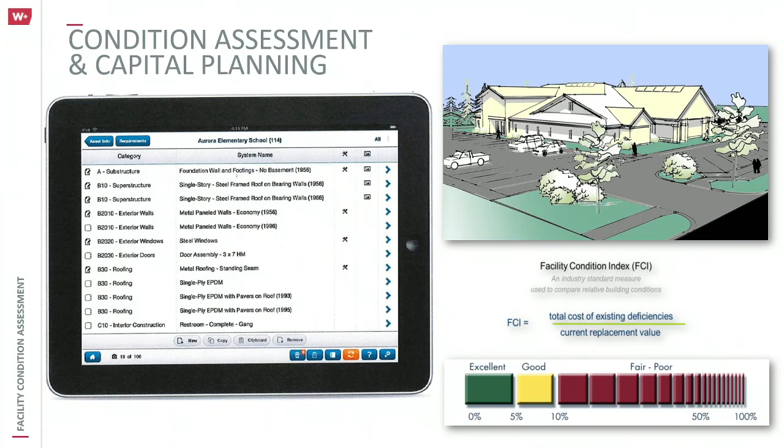We use a program called VFA, which has two phases. One is the field collection of information, and the other is analyzing it. It's all done on a tablet, and the assessors, the architects and engineers go out and look at all the systems, the site, and all of the components.

Everything is tied to two industry standards: BOMA, the Building Owners and Managers Association, which has established life cycles for all building and site components, and RS Means, which is an industry standard construction estimating database.

The auditors receive their assignments on the mobile device. If we were assessing a room, for instance, we would look at the acoustic tile ceiling and say, generally not in bad shape, a few things need to be replaced. You'd key that in, and it would automatically generate a cost for doing that, as well as when it's estimated it needs to be replaced. So you have that for each building and site component.

The information is objective, it's transparent, and it's defensible because it's tied to industry standard databases. It's not our guess as to what it would cost.

From that, you get a listing for each building of what is required by year, so that the city, the city manager, and facility people can look at that as you're doing your budgeting for each year. You can say, okay, we have to be prepared in 5 years to replace the roof, we need to be prepared to replace the heating system in 8 years. Will it fail then? It's not guaranteed, but at least you have a benchmark to plan going forward.

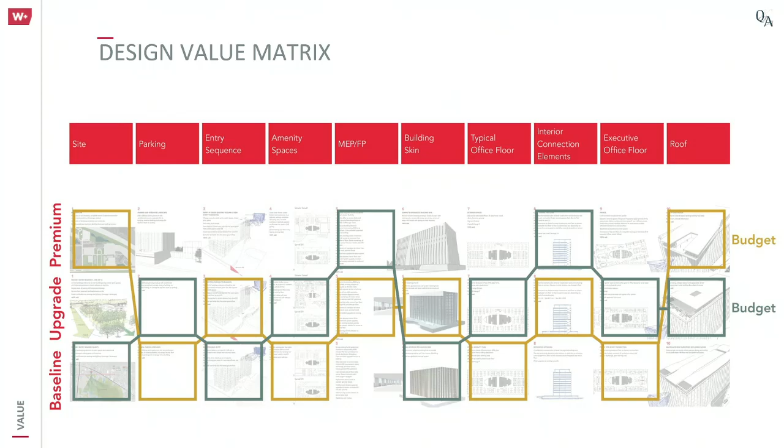Our goal is to identify options. I know this is impossible to read, so just look at the colors and the boxes. By providing options for you and dialogue with you—you might have heard us use the term listen, we don't do this in a vacuum—we're very much a collaborative process. Working together, identifying through a design value matrix what are the best options to pick, so that we identify any changes needed early on in the process, when it's easier and much less costly to change. That's something we're proud of at Wightman and that we've used for years with our clients on architectural projects.

So it's really important that we identify those factors that are going to affect maintenance and control them early on through the selection of materials and processes as we design the building.

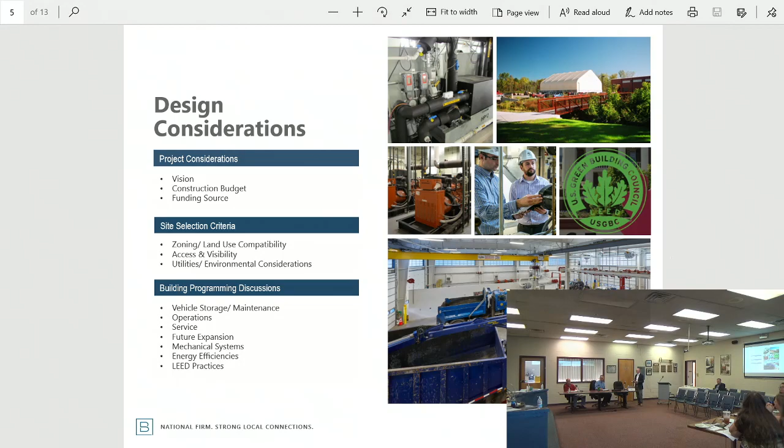What I'd like to do is turn it over to Brian a bit on the design side, to give you a sense of what we look at when we look at building design, site selection, and system design. We'll give a little excerpt on that, and then flow into some of the programming pieces.

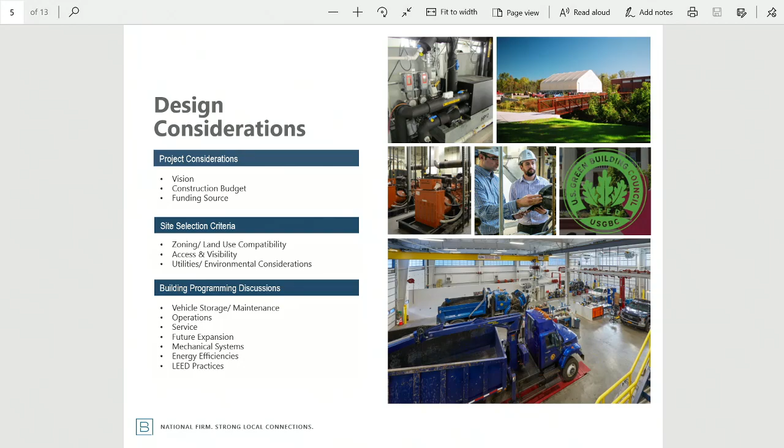So the first item on the list is visioning. That's specific to what you've heard of as visioning sessions—just to see what you have in mind for the facility. Not only what you have in mind, but what the uses are going to be, what the needs of that facility are. From that, you look at certain processes—all high level, looking at vision, construction budget, and funding source, focused on the main purpose of the facility. We're also looking at the physical attributes when it comes to that visioning, and those attributes could be anything from the longevity to the maintenance of the facility.

We're also looking at whether you want that facility to be green, LEED, even net zero for that matter. Those are very specific, those are very important items to know up front. They'll affect the decisions as they go through that whole process.

And then last but not least is really the appearance. It's obviously something that you want people to know that where their funding went, it was worth it, something that will hold up, something that, depending on the location of that facility, is really an important factor to how that building is perceived from that curb appeal standpoint or appearance.

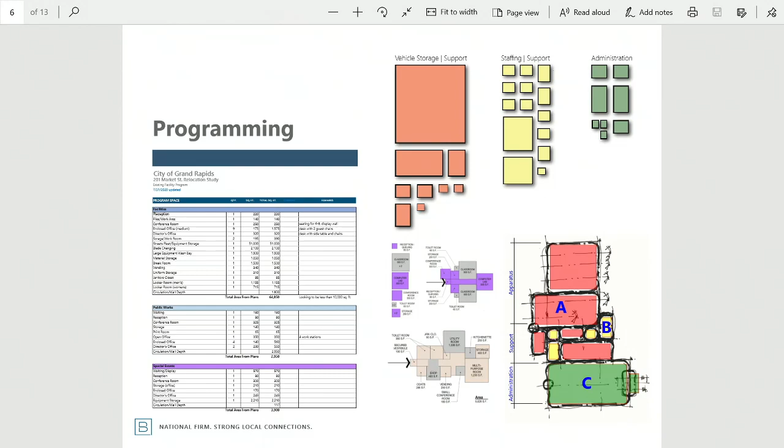If it was a little larger, you could see that this first column here is actually the spaces, those needs, those uses. Those are assigned a quantity, meaning if there's so many restrooms, toilet rooms, showers, or what have you, those get assigned a quantity as well as a square footage. And then there's remarks if there's some specifics that are defined. So this really gives just an outline, a real program outline.

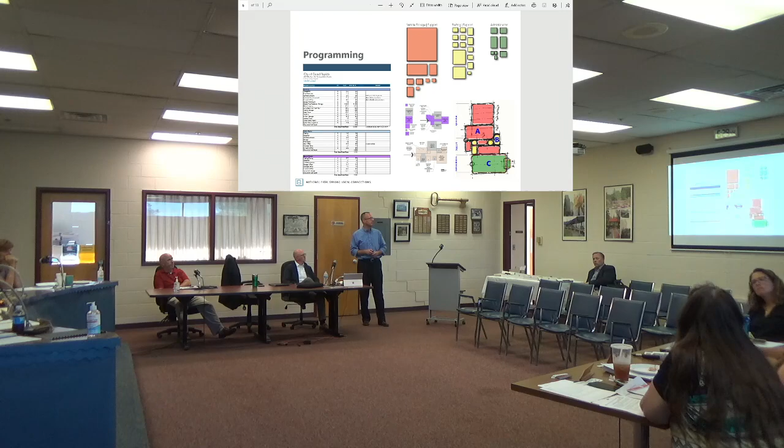And so from that stage, looking at space relationships, it's easiest to take those square footages that you see within these columns and give a graphical representation. Here we'll see some larger spaces, whether that's a large apparatus bay or garage of sorts, and maybe there's a certain shop size that you can see. But what that does is it gives you an idea as far as relationships for how those spaces are to be developed or can interconnect or link.

And so here we see different color coding, which defines the different types of spaces, whether it's more for administration or more for maintenance. And then from that stage, it's the idea that we take it and start reorganizing those spaces so that there's a flow that goes through, from maybe there's a certain procession or entryway, what has to be adjacent to that from a public standpoint, is there a certain definitive line between more of a public and private standpoint, and will there be any point of those two interacting?

So that really becomes a block diagram, what we consider, and then this is more of a sketch to start seeing how all these different relationships can be assembled in one large mass, or one large footprint. And here we can start seeing nodes that start defining entryway, and then we start seeing some idea of access as well as different types of uses, how those can be intermingled in that space.

So that's really, like I said, this is just one tool, one way of taking the information and starting to develop, which you can see through that outline here, you can start seeing a building or a form develop from that.

With that, when we do look at a site, there are some components, and I'm going to have Brian walk through these, but these are major factors when we look at the building. Obviously we want to put a building on the site, but there's sometimes a cost, there's some restrictions, and this is where we do a deep dive into that site. This is why we have Site Civil on board on our team, so they can do some of this early investigation, so we don't get caught on something.

Looking at zoning, I mentioned it before, zoning is very critical in that sense that we have to make sure that both the ordinance, the zoning map, as well as the use of the facility all coincide. If not, then that brings another set of questions or other things that have to go for approval, which affect schedule and decisions. So we also have setbacks, and looking at the different areas, those are defined by the ordinance, those setbacks, whether front yard, side yard, backyard. Those also start defining where that building area could be.

It could be that there's a 25-foot front yard setback, so you end up finding out defining where that front yard is, defining where that setback is. There's maybe certain things that can go within that setback, parking, but then your building starts at a certain point and can't go into that area without getting a variance. So that's just one example of site restrictions.

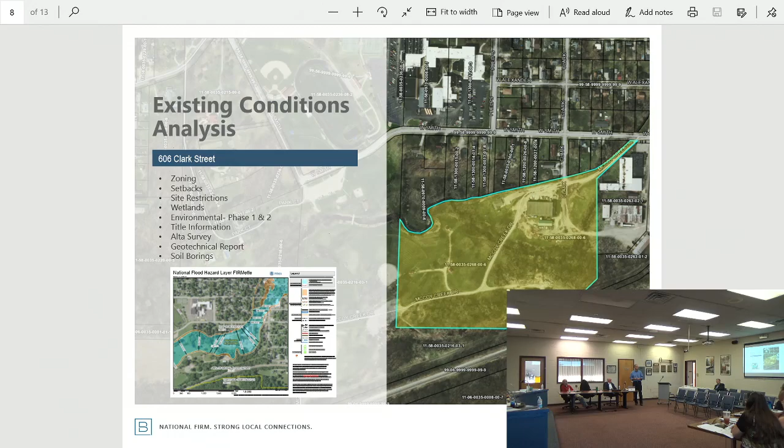One thing that we did find with this particular site, you can see here that there's a blue pathway. This is a map that we found that delineates that floodplain area that would go through the site, which seems to reason why there's that contouring. That doesn't mean that you just say, I can't build there. There's certain things that can be done in order to make it buildable within a floodplain area. The question more is that it becomes, as Buddy mentions, more budgetary to what that cost would be. There are ways about it, but you have to start weighing that against the cost to implement that, as well as wetlands.

As soon as something is surveyed, wetlands can be defined. If there's a floodplain, maybe there is some sort of plantings that will define that wetlands area. That also brings a little bit of complications. It doesn't mean you can't build, it just means there's ways around it that take time, whether you're going to get an approval to have that wetlands relocated. Usually it's a 2-to-1 ratio of where that can be, and it's got to remain on site. Once again, that's a cost standpoint or a cost item that we have to consider.

So environmental, phase 1 and phase 2. I'm looking at that environmental phase 1 would be an overall environmental study, seeing if there's any other flags, any other items that should be considered within that site.

There could be anything from certain soils that aren't desirable. There could be certain things that are found, certain history upon what was built before. Maybe there's foundations there already from a previous building. So that's an important element as well.

Title information as well as Alta survey, those go hand in hand as far as how that area is defined. Title also defines if there's any easements that go through there. That also starts bringing that extension down on what that buildable area is.

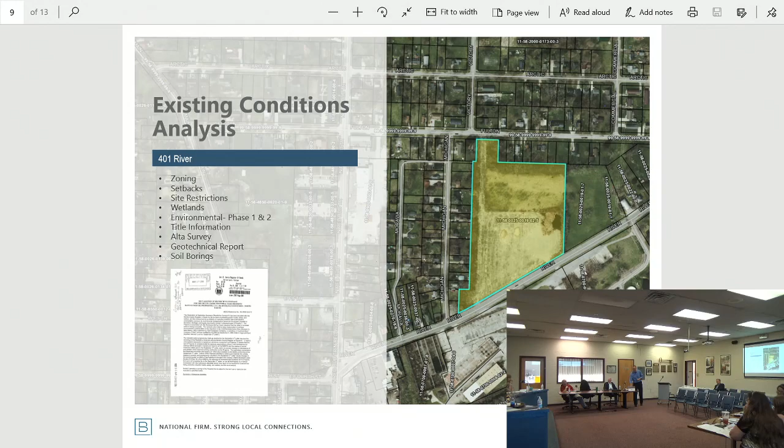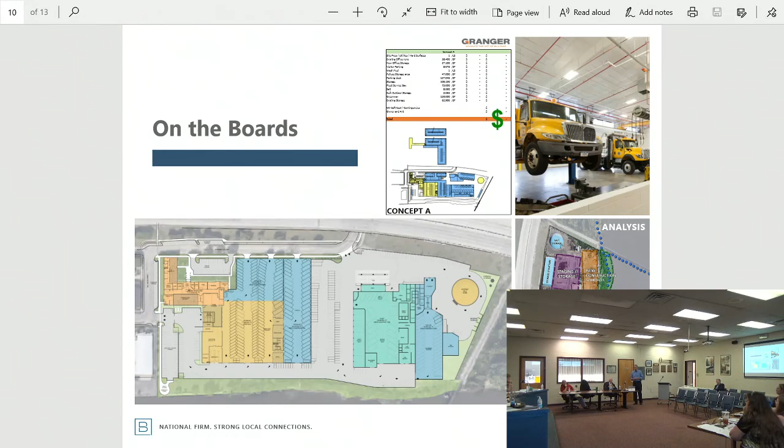I'm guessing that's not anything on the site floodplain, and this one with the environmental that you guys are not aware of. I'm assuming you probably are. We didn't get into all the details of that, but obviously when we do those researches, we have to pay attention to that stuff. And there's some potential costs for how we develop that site.

And the phase one, or the ESA study, phase one would also bring that to light, what they find. Our site engineer is a real crackerjack as far as looking up that information. He does that very often, almost on a daily basis, so he knows where to go, where to look up from site to site standpoint to get that information. So, which he also found the floodplain information.

So that's just a little snippet on the site pieces. Obviously, we get into a lot more detail with that.

As we move forward, DPW buildings aren't new to us. We have several, hopefully you read the proposal. If not, maybe go back and see some of that. There's a lot of good information in there. I've combed over it. I've been involved in a lot of those projects. So there's some good information about who we are and what we do.

We currently have a couple projects that are very similar to what you're looking to do, and as we look at scope and stuff, we're working with the city of Grand Rapids right now on a 201 market relocation. They're taking all of their parks and recs and city and fleet and refuse and all of that and moving that to a new site downriver.

Kent County is moving off that site to a new facility. So we're doing a big study for them to analyze all of their departments and how they function, and the pros and cons of putting them on the existing current site that they have now.

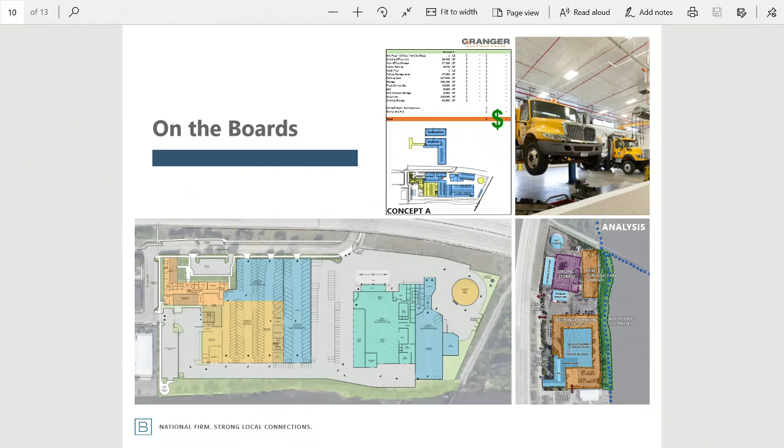There's also refuse that's on here, there's a fueling tank. There's a lot of consideration when we went through the site for site and circulation, how we access that, how access comes off the main area, how the truck flow comes into the space.

How the trucks move through and back out, how they're serviced and set up from the morning, how you enter those vehicles and leave, and how you come back in to receive your salt. There's a huge planning process for that, circulation, making sure we have the right space for vehicles and maintenance.

That's the planning piece. We can get to the architecture later, but this is a good example of that.

We also do an analysis and overlay. You can blow that up. That overlay really shows the intent of program, what would happen on this site if we were one story. We're actually looking at a few multiple stories, then vehicle storage and parking.

So there's a little variance, when we show the client that your site really doesn't fit all the program. So we're looking at different options.

On this particular project, we also get into the pricing and work with budgeting. We do that in-house. This particular project was with a construction partner of ours that we've worked with, and that's been a key relationship when we do that type of work.

The idea of bringing on a construction partner early, I think, is really key, being able to have someone listen into the early decision-making that's happening, so when we get into the pricing, they understand what's there.

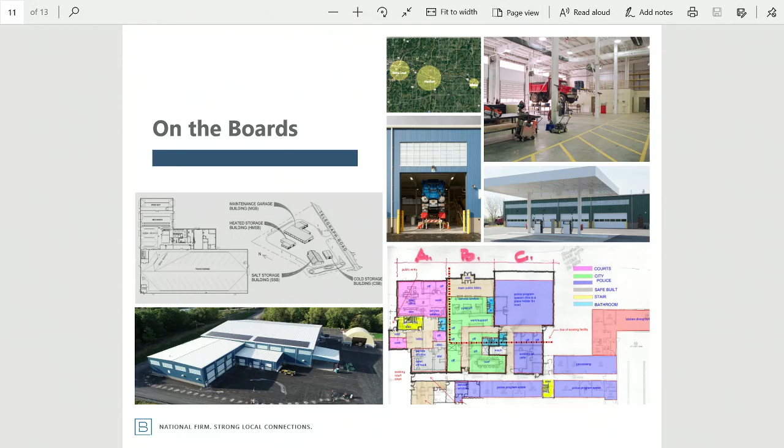We've utilized that program across three different sites, three different parts and pieces going on those buildings. So we've analyzed each one of those sites, ranging from about 8.5 to 32 acres.

The unique thing about some of those sites is we do have to work with lifts. Because of the elevations and grades, we have to bring in new utilities on some of those projects, which is key. We also run into a little bit of environmental consideration, so that's something key on that.

One of the challenges with that MDOT project is that MDOT hasn't built a facility like that in over 30 years, so none of their staff really knew exactly what they needed to build that facility. So the programming, talking with them, getting the details of what, when you say you want a maintenance bay, what do you want in that bay?

You know, we found out the vehicles they want to put in there are huge snow removal vehicles. So finding those details helped us lay out the maintenance facility to exactly what they need.

So my last slide is why Bergmann, because we're committed. We will be committed, we've got a single point of contact. We're very excited about being in the community, and that's a key factor. There's also a passion for our team because we do a lot of this work.

I mentioned early on I had a personal passion. As a green young architect, I was gung-ho. I was one of the main designers for the high school with some renovations early on in my career, and I had my ear and nose drug over every detail that I worked on. To this day, I remember working on that high school, and that's been really key to me.

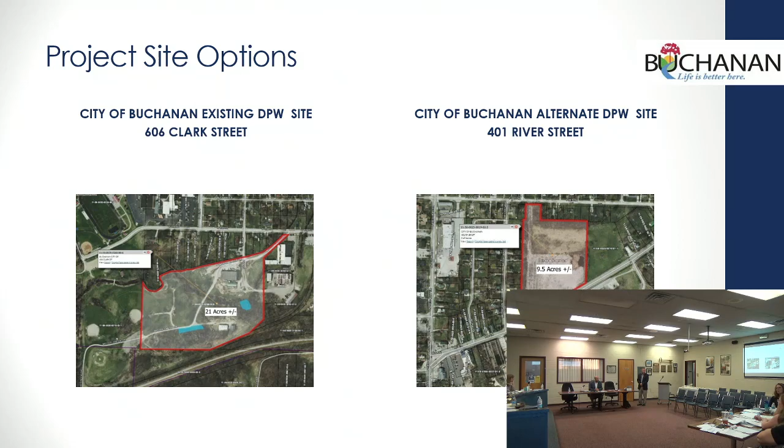So the existing site, there's some pros for it. You've got infrastructure there, buildings there, investment made, but you've got a lot of challenges with that site, just with the floodplain and the layout down there. There is a little piece of upland property that runs along the south edge of that property next to the tracks that's out of the floodplain. I think that's where your salt storage building is right now. That's really the only upland area on that site.

Like I said, you guys have been using that site for years, so the neighbors know you. Moving to the other site, obviously it's roughly half the size. You've got new neighbors that you might have to deal with. We don't know what else potentially exists on that property until we dig into it a little farther.

But like Dirk said, doing this kind of initial upfront work and fully understanding the pros and cons of each of these sites is going to pay back immensely. You're going to have to do that work to really understand what you're dealing with.

So let's talk a little bit about schedule. We talked about 5 to 7 weeks for the initial phase, and of course that's in response to the dates that you guys gave us. We're trying to strive for getting this done fairly quickly. There are some elements to this, again, the site components, that could push the schedule.